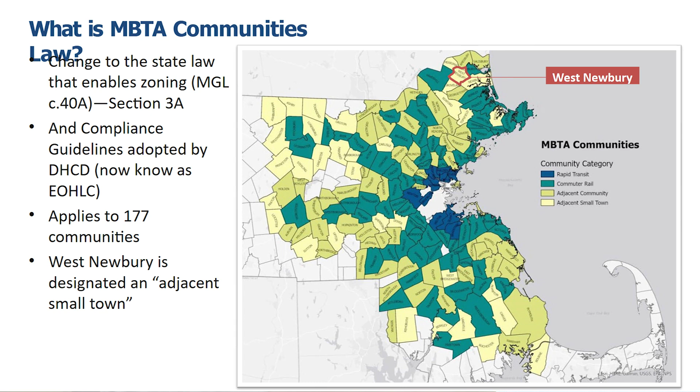So like I said, the law requires the town to adopt at least one zoning district. It has to allow at least 15 dwelling units per acre. So a dwelling unit is a complete living quarters for one household. It means it has to have at least a place to sleep, a place to eat and to cook, and a place to use the facilities. So that's a dwelling unit. So the zoning has to allow up to 15 dwelling units per acre.

The law, there are guidelines to the law that set a minimum number of units that every community has to zone for, and that is based on basically how close you are to an MBTA station and how big your community is. So you guys are at the lowest threshold of requirement, and for West Newbury, it means that the town has to have a minimum zoning capacity of 87 units.

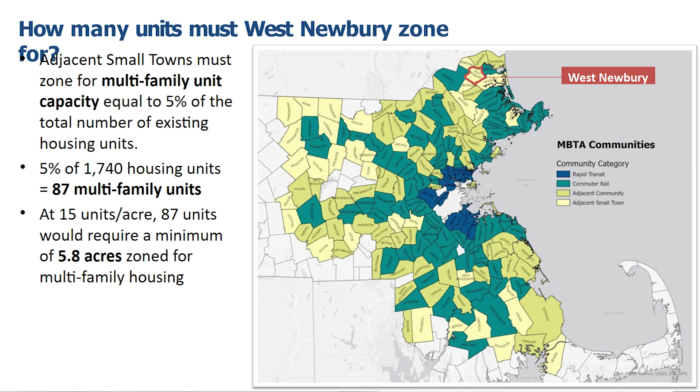Next slide. So some of you might be wondering, what happens if we don't comply with the law? So first of all, it's a state law. It's just like any other law that's out there. You're supposed to comply with the law. It's illegal not to comply with the law. So there are some consequences if you don't.

There's about 15 grant programs that the state offers, some of which are substantial, like MassWorks, which is the state's main infrastructure funding program, that the town will not qualify for if you don't comply with the law. So there's a money stick attached to this. You'll lose out on significant grant funds if you don't comply. You also might be subject to either civil enforcement or enforcement of state and federal fair housing laws. So complying is something to take seriously.

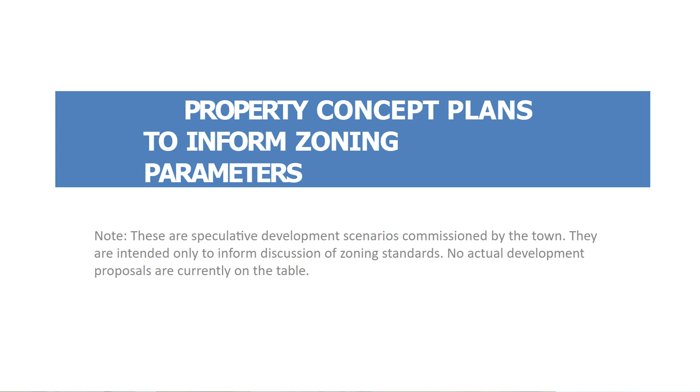So Peter is going to walk you through some concept plans for properties that we're looking at for potential zoning districts. We went through a process of looking at the entire town, analyzing what properties seem viable for multifamily housing based on physical constraints, things like steep slopes and wetlands and floodplains, regulatory constraints, things like wetland buffers or river protection areas, and then also just properties that seem like they would be not viable to be developed, things like cemeteries or town-owned properties or protected open space.

And so through that process of basically knocking out all the land that was not really suitable for multifamily housing, we settled on essentially the Main Street corridor as the most suitable place for multifamily housing, in part because it has your most robust transportation infrastructure. It's got a road that's already carrying traffic and is able to carry traffic. It has sidewalks in some places. It also, in some places, is served by drinking water, which is important if you're trying to develop additional housing.

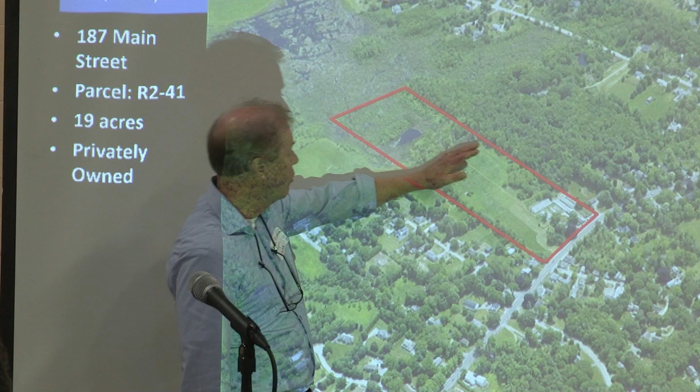So you're familiar with both of those properties. They're old greenhouse sites. You may have shopped there over the years, but both of them go way back from the road, and you may not be familiar with how much land is there. So Knapp property has relatively narrow frontage on Main Street, but it goes way back. But the back third of it sort of rises up to a hill and then goes back down again. And the back of it is mostly wetlands. So of the 19 acres, not all of it is developable.

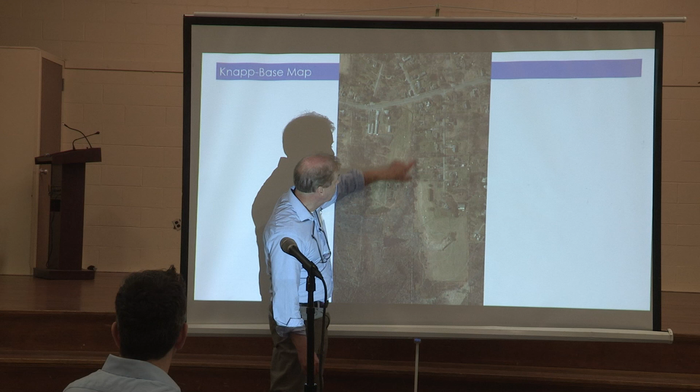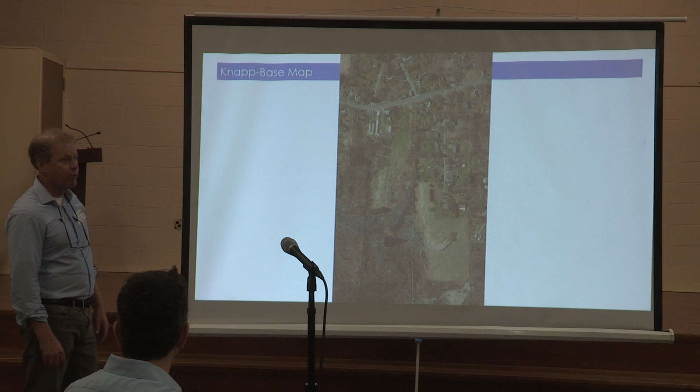The next slide, Dylan. So this is looking at it from a different direction. This is north facing up. Here are the greenhouses. This is the property boundary. So it's this long, narrow property with wetlands in the back, a big field, and then the greenhouses in the front.

So in terms of what we look at and what we're trying to encourage with the zoning is development that actually enhances a neighborhood and enhances the town. There's always the joke: what do you name a subdivision after? It's the thing that you get rid of, like Open Meadow Estates or Deer Run. There's no longer any deer or meadow there. But here we're actually trying to preserve as much as possible of the beautiful open space, or wetlands, which of course have to be protected under state law, and really use the development to create something that's not going to be just an eyesore.

And so Dylan's going to talk later about the design standards that go along with the zoning that are really intended to make it the best possible kind of development for each of these sites, really forcing people to think about the design more deeply than they typically would with a subdivision. So when we look at this site, for the purpose of these demonstration plans, again, these are just imaginary plans that are meant to guide future development. They're not the future development plan itself.

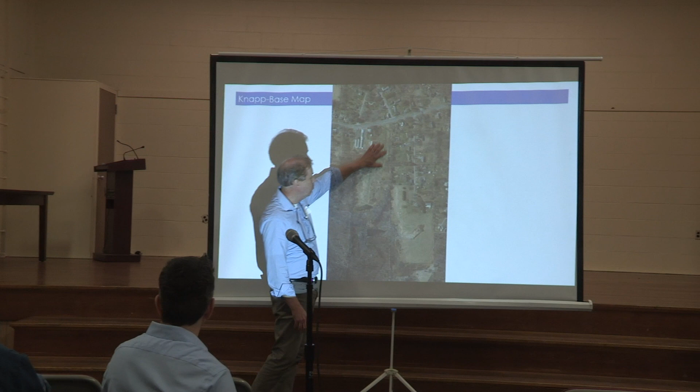But when we look at it, we're trying to demonstrate some of these principles of good design, one of which is let's protect what we can of the site while we're developing it. So when we look at this, that big open meadow with the view from Main Street is really beautiful. You don't see a lot of it, but it's a really beautiful view. So can we protect that?

Can we create some buffers to the wetlands that go beyond the minimum buffers required by the law? Can we reuse some of the parcel that's already been developed rather than just digging up the green part of the property and not reusing the greenhouses in that area? And so the plans are really keeping those kind of things in mind.

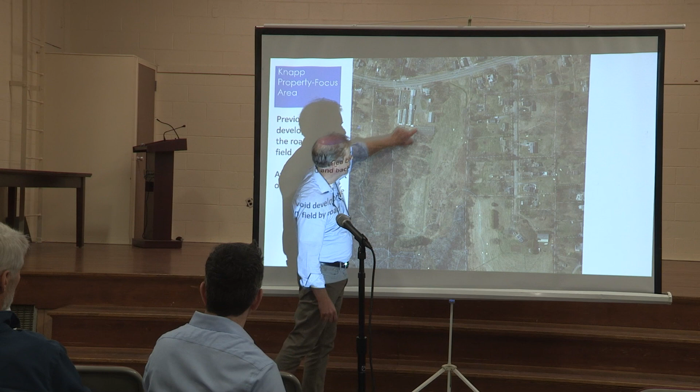So the next one shows, zooming in a little bit, the previously developed area up by the roadside. You can see the contours here, there's kind of a knoll in the middle, and then it wraps around and down toward the wetlands.

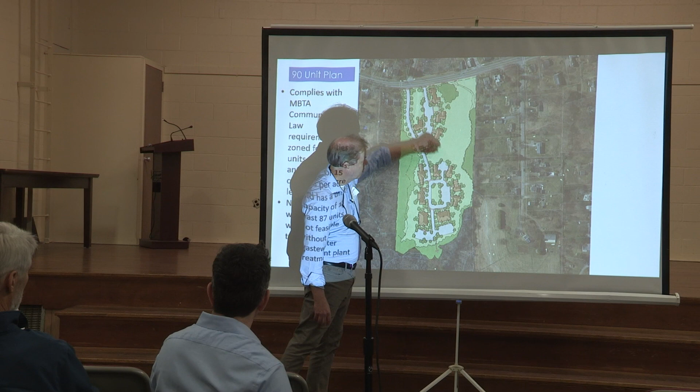So the next slide shows one potential development, which is development of this entire area. If you drew a line around this, this would be about the 6 acres that we're aiming for to get the minimum density under the law. So if you zone that 6 acres for 15 units an acre, it's about 90 units, which meets the town's requirement to create at least 87 units.

One of the things we want to point out is that, as you know, the whole town is on private or shared wastewater systems, mostly large septic systems, and this would probably be served by a similar kind of system. Under the state law, under Title V, there's this cutoff point at 10,000 gallons a day; if you produce more wastewater than that, you have to have a much higher standard of treatment, which basically is a much more expensive treatment plant with much more oversight forever. The good thing about that is you get better water quality coming out of it.

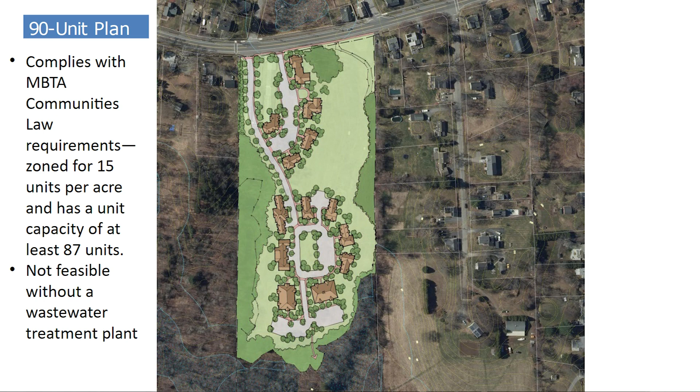The bad part of it is it's very expensive, and it's unlikely that anyone would be able to afford to build just 90 units with a private wastewater plant, and 90 units is about 20,000 gallons a day. All of which is to say that what's more likely is somebody is not going to build 90 units on any of these properties. It's probably going to be more like 30 or 40 units. So the next slide I'm going to show you, we won't go there yet, but the next one is showing one that fits under the 10,000 gallons a day.

So looking at this property, we're sort of starting by, how can we enhance that experience from Main Street? Let's protect the view of that big open meadow. Let's reuse some of that development. So this is like redeveloping that existing house for 2 or 3 houses, maybe turning the barn into another 2 or 3 houses, and having a driveway with some parking areas that sort of curves around a lovely green space, and then have the main road come in along the edge of the property and wrapping around the hill.

And we won't go into all the details, but this fits very nicely within the topography of the site. It also brings the entrance of the road directly across from, what's the name of the road across the street? Harrison. So it basically creates a right angle intersection with the other road. It's at the base of this curve, so there's good sight lines in both directions, etc. So this seems like a good place to have that entrance because it avoids impacts on the visual character and fits well with the site, and then provides this opportunity for a little cluster of homes as you come in.

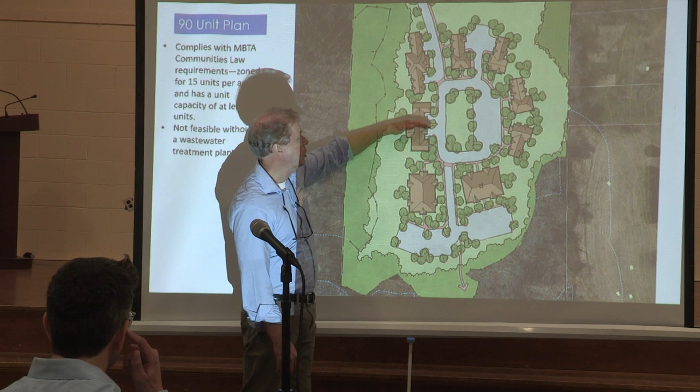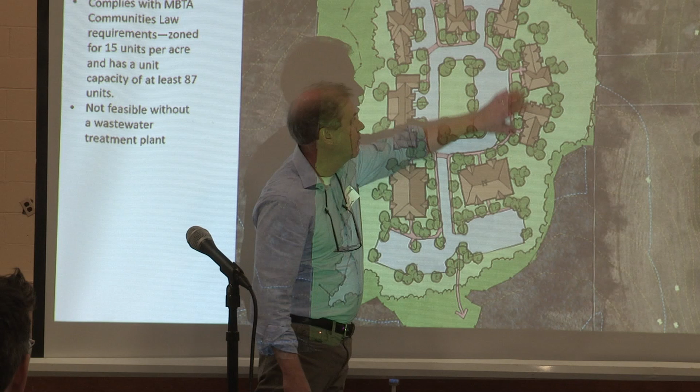And as we move further to the south, there's room on the back part of the site for a larger cluster of buildings. And in this case, this could include a combination of townhouses. So these are homes with a shared wall. And these 2 structures might have 4 units in each one, but also some small apartment buildings. So this is like a 16-unit apartment building at 2.5 stories. And then some apartments where they're sort of stacked up above each other in units that are designed to look more like big single-family houses.

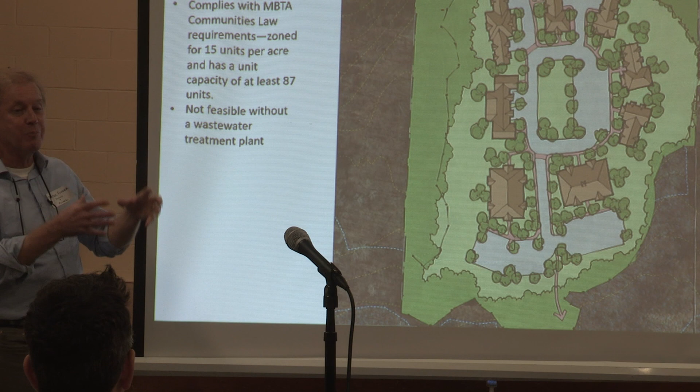And in fact, if you put these next to a lot of the single-family houses that you have here in town, they would probably be smaller since you have some big houses. But the idea, and this is captured in the design standards, is to really have architecture that feels like big rambling country houses, not shoebox apartments that you see down by the highway.

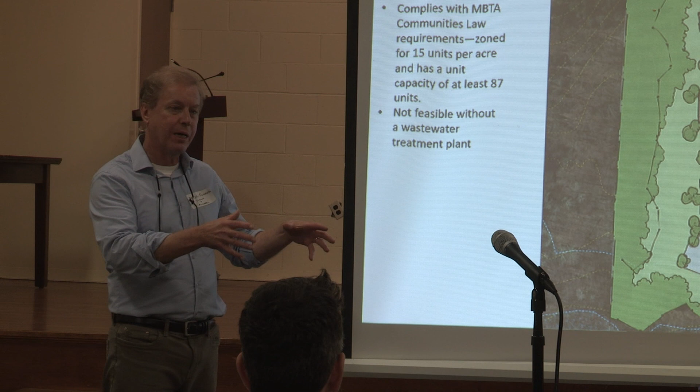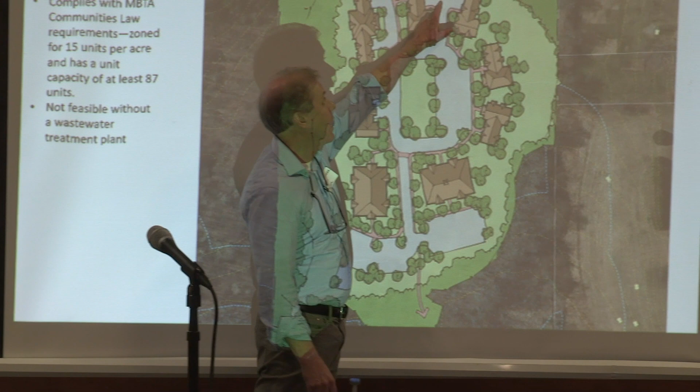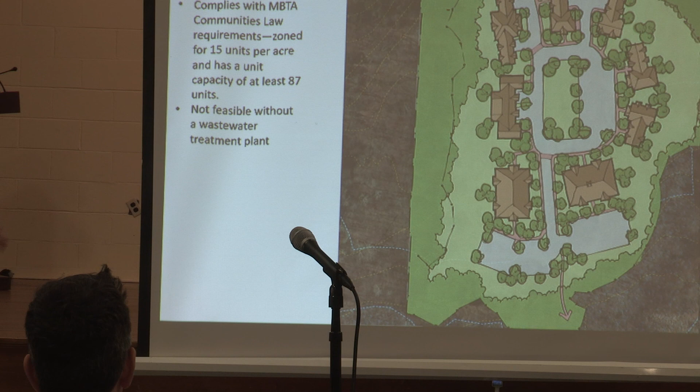And then the other idea here is to focus the view as you come around here on this nice green space, to have parking that is placed behind the buildings or inside the buildings or to the side of the buildings, not right out in the front yard, right? So it's really kind of a village-style plan where you come in and you see a beautiful green space, you see the front yards and front porches, and it feels like you've really arrived in a community rather than just another subdivision.

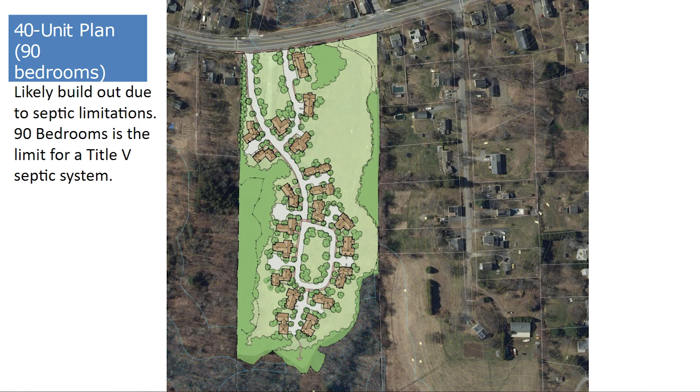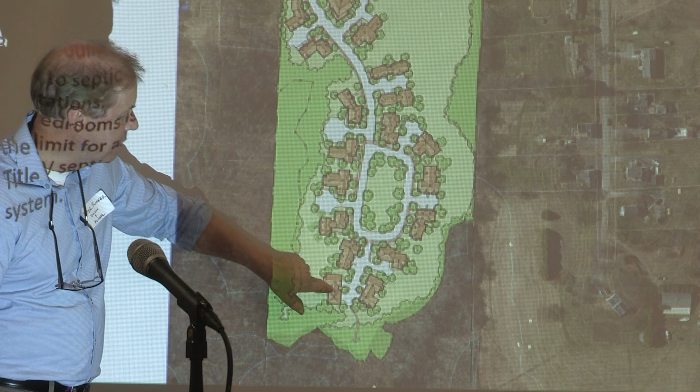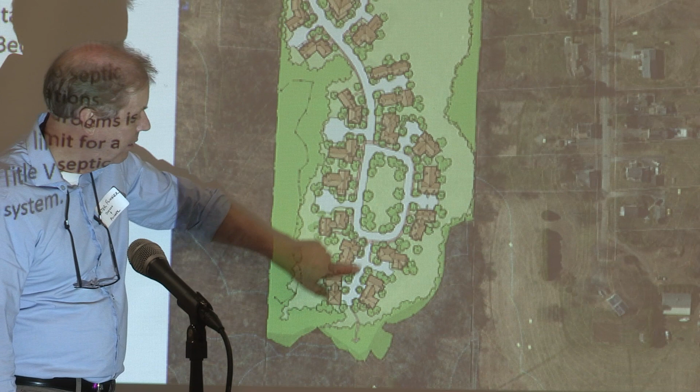Next one is a 40-unit plan, and you'll notice the footprint is quite similar. We have the entrance, we have a little loop road, we have a larger loop in the back, but in this case, it's less than half the number of total units. So what these are is smaller, more traditional house types, most of them connected as duplexes. And so again, with shared parking in between the units so that you're not looking right into the garages on the side and in the rear. Here there's 4 clusters of 2 that share a driveway.

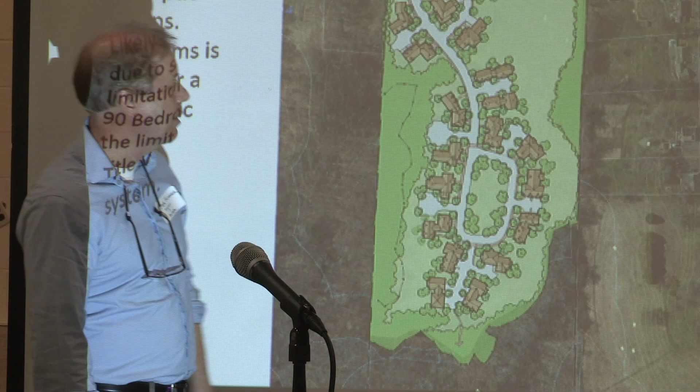But again, the principle is to arrive at the beautiful part of the site, have the parking tucked behind or in between the buildings, and then have a lot of trees planted around, continuous sidewalks that link all the different parts of the property, and also continue into the rest of the site, which is going to be protected. Do we have details of this one?

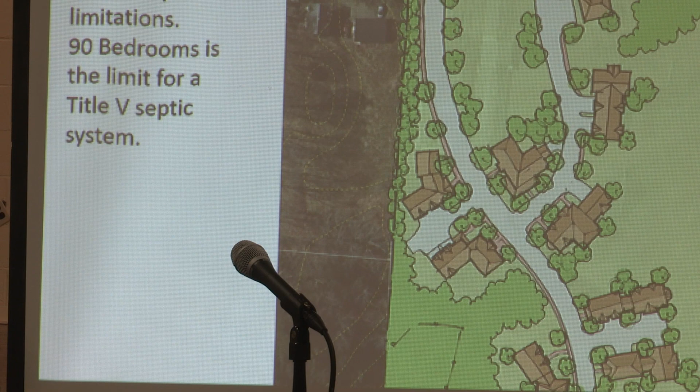Yes. So in the front, again, what you see from the road is the entrance drive, a big open space, cluster of houses. And one of the things we're trying to do with these is capture the sense you get when you drive through a typical New England town like West Newbury, which is you come through an open space and then into a dense cluster of houses and then back into the open space again. It's varied and interesting, right?

And so we can do that, both as we drive along Main Street, but also as we come into the property, sort of open, more dense and interesting, then open again. If we go to the south part, you come to that big open green space, which is big enough for recreational purposes. Kids can go play ball there.

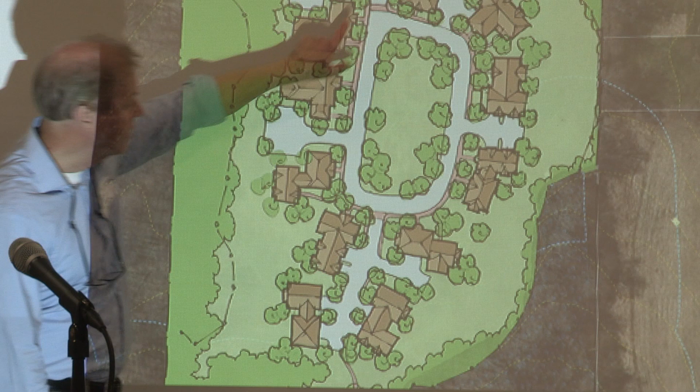But then each house has sort of a formal side facing this green space, where you can have front porches and walks coming up to the porch from a sidewalk that rings the whole thing. And in the back, you have private space. There's probably going to be condominium ownership, but each unit can have its own designated space with a private view out into the surrounding woods and wetlands.

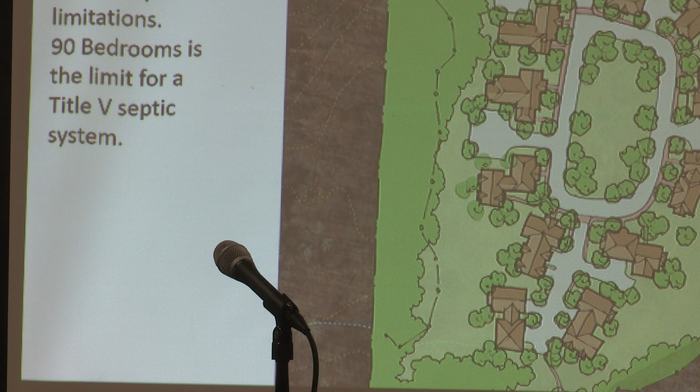So again, a lot of this is stuff which any private developer would do in a market like this to try to make a really nice quality development. What we're really trying to do is capture this in the design standards to make sure that they have to do it. Again, so that in the end, this really becomes something which is an asset to the town and not just another eyesore that you say, well, it's too bad they did that.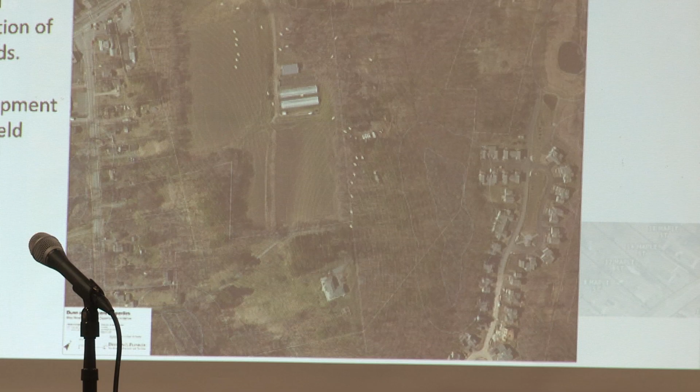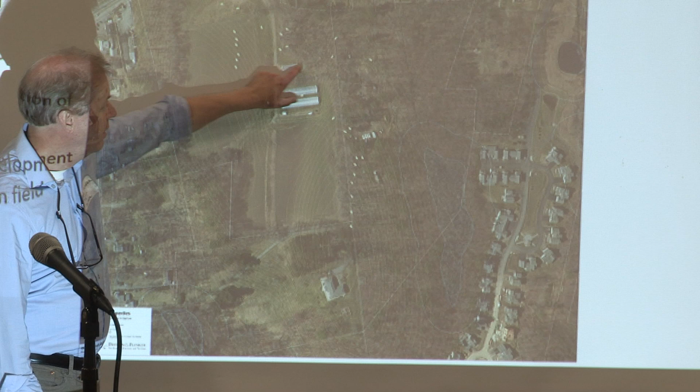So this is looking at the parcel boundary here. And again, we're looking at this beautiful big open knoll, which seems like a really great thing to try to protect. There's this other area where you have some existing greenhouse development in an area that's not really visible, which seems like a good place to develop. And then you have the area up toward Main Street, which is already developed.

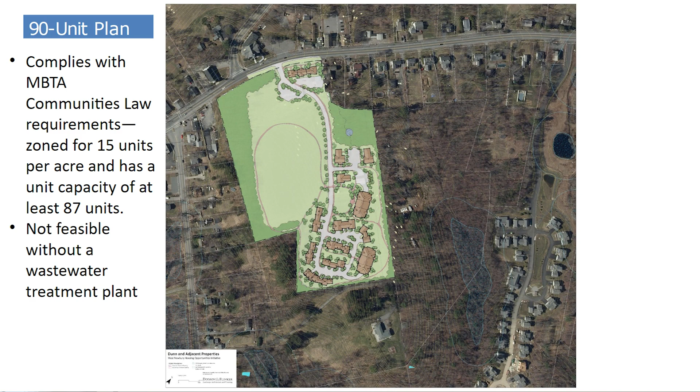So if we go to the next slide, it shows one option for that. And this is again with the 87 or 90 unit plan. And this is, again, designed to be kind of a varied experience as you come in on the main road. You look up at the protected open space on either side, and then you come into something which is designed to feel like a real cohesive neighborhood. So we go to the next slide.

This is a larger apartment structure with maybe 20 or 22 units. We've got townhouses, which are sort of individual single family units that share a side wall, and then some smaller apartment buildings where the units are stacked up above each other.

But again, we're trying to orient the buildings so they have kind of a formal face, which faces the public space on the street, and then they also have, to the extent possible, private deck spaces to the rear. They can look out on the open space, or in this case, there's kind of a parking court on one side and a shared green space on the other between these rows of townhouses, and a pathway that leads up to this larger apartment.

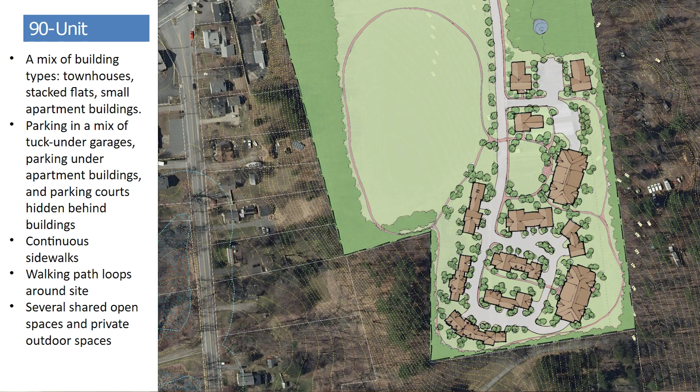So again, it's taking a cue from a lot of development we're seeing now, which tries to mix different kinds of housing types together, which is good from a demographic standpoint, because we need lots of different kinds of housing types, because we're no longer all two-parent families with 3 kids. We're much more varied demographically. And so the apartments provide for smaller units, for younger people or older people. The townhouses, of course, can accommodate anybody. Larger duplexes might be for families.

So it's really trying to enhance the overall inventory of housing in the town by providing more diversity that can meet many different needs of different people without having to move to a different part of town and live in an ugly condominium when you're young, move into a big single-family house when you have a family and then have to move back to the condominium. It might be staying within a single community like this throughout your life.

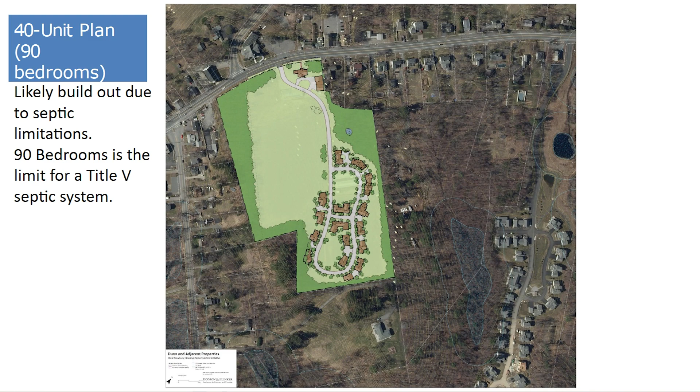Right, so this is the last one, which is, again, the 40-unit plan. So the previous one was 90 units. This is 40, more likely to be the scale actually going to be developed on these sites because of the septic requirements. So in this case, if you go to the next one, we come up and we have that long loop road. Loops are necessary because you want to have public safety access that's not limited to just a long cul-de-sac. But they also give some opportunity to create some sub-neighborhoods within the overall project.

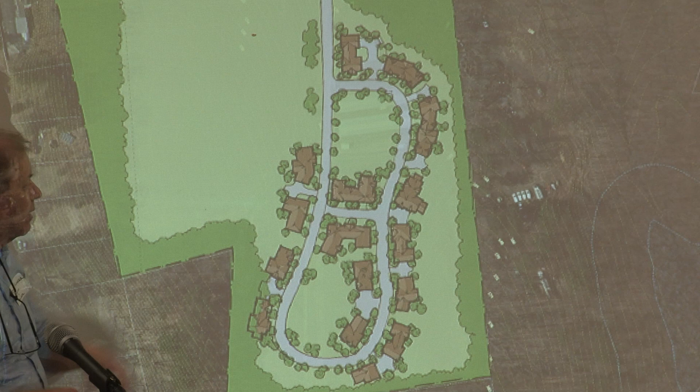So you come in, you sort of arrive at this big open space ringed with houses. Again, parking to the side or the rear, private space to the back, sort of more formal public space to the front, some shared open space for kids to run around in. This link provides access to some garages in between these building structures. And again, a variety of, in this case, mostly townhouse style units, but in sets of 2 and 3 and 4 and 5 units, giving it some variety as you go through.

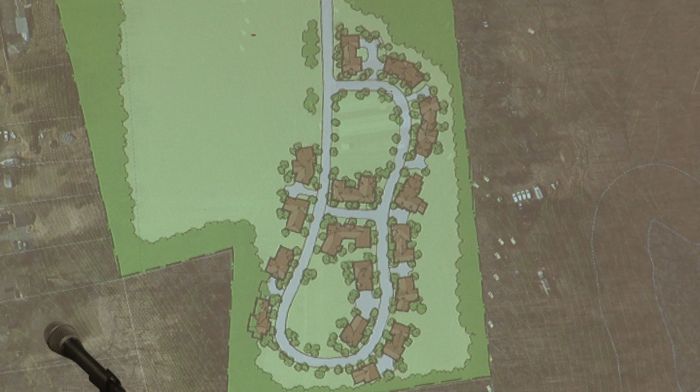So here are, what are we seeing here? Dylan, are you taking over at this point? This is a very carefully coordinated presentation.

Back to you. So the idea with doing those concept plans of drawing out what development could look like on these sites was to both get a sense of what might be acceptable to the town within the parameters of the law, but then also to use the knowledge that's generated by drawing the plan as the inputs to writing the zoning, right? So that the zoning is based on the plan. A lot of times what happens when people write zoning is they kind of pull out abstract numbers that sound good, but there's no plan behind it. So when somebody goes to develop the site, they're applying abstract numbers to a real site, and it doesn't really work so well. So in this case, the concept plans drive the zoning.

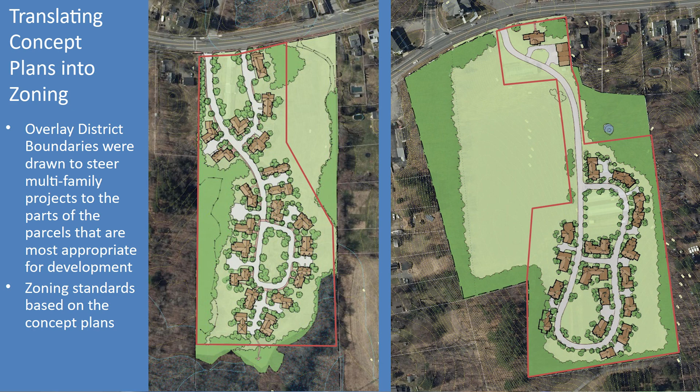Next slide. So translated into just zoning boundaries. The idea that the planning board is currently considering is to adopt 2 different overlay districts. They have the same standards, but they're 2 different mapped areas. So one for Knapp and one for Dunn. Either of those areas on its own would fulfill the town's requirements under the law. So a big question moving forward is, should the town adopt zoning for one of these areas, and if so, which one, or should it adopt zoning for both of them?

I think the rationale for adopting zoning for both of them is, A, the town does have needs for diverse housing. So there's a sensible basis for this law. Whether the law itself makes sense, I'll leave that up to you. But there is a true housing crisis in Massachusetts.

If you have a relationship with somebody who's been trying to buy a house and doesn't have a lot of money, or even has a lot of money but is in a high expense market, you've probably seen a lot of angst and a lot of challenges. There's a real need for housing, and there's a real need for smaller units than the single-family housing that dominates

many communities like yours. So reason number 1 for adopting two districts is to fulfill the town's housing needs, to make more opportunities for older people, to make more opportunities for younger people, to make more opportunities for people who work in the town, who grew up in the town and can no longer afford to live here. And then reason number 2 is it sort of aligns with the spirit of the law.

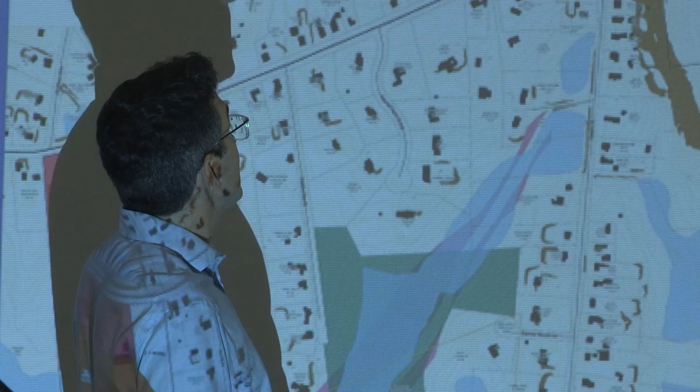Your commercial zoning district is barely legible on this map, but it's basically up in here, comes across the street, and then drops down right here and excludes the portion of the Dunn property that used to have the greenhouses. So the idea here is to allow mixed use, which would extend your commercial district a little bit further up the road, which probably would make sense regardless of this zoning change from compliance with the MBTA communities law, because it would enable commercial development across the street from other commercial development, on a portion of the lot that's actually possible to have commercial use on. And then also for the front of the Dunn property where the greenhouses were.

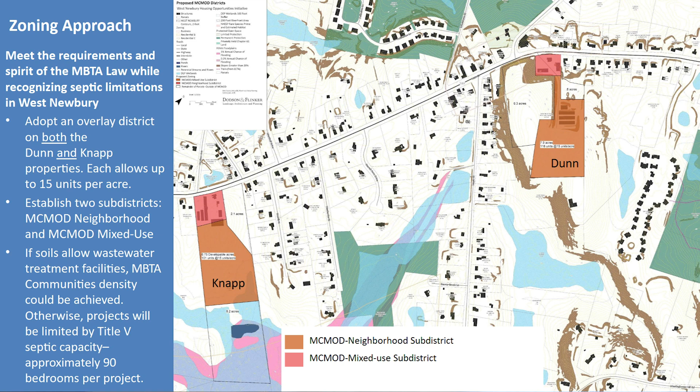So some of the standards that are written into the zoning, so there's a draft of the zoning and it's on the town website now, maybe? Okay, just finished writing it last week, so it's a little fresh, but the planning board is gonna start reviewing it at their next meeting and subsequent meetings. So the zoning has a minimum sort of tract size to opt into the overlay district of 5 acres. So either of these sites would work, but you can't really subdivide them much and still opt into the zoning, right? So you couldn't split off like half of this and opt into the zoning. You need to use pretty much most of the entire overlay district to take advantage of its provisions.

On the front part of Main Street, the front setbacks are basically based on the average of adjacent structures. So it's saying, make the front setbacks like what's there now along the street. On the interior of the lot, the front setbacks are relatively short. They're a minimum of 5 feet. That's in an attempt to get a density that matches what's required by the law, while allowing things like townhouses and smaller multifamily buildings. So in order to fit smaller buildings on a lot as opposed to really big shoebox apartment buildings, you have to put them relatively close together and close to the street. And close to the street actually creates a nice walkable village center feel. So that's the front setbacks.

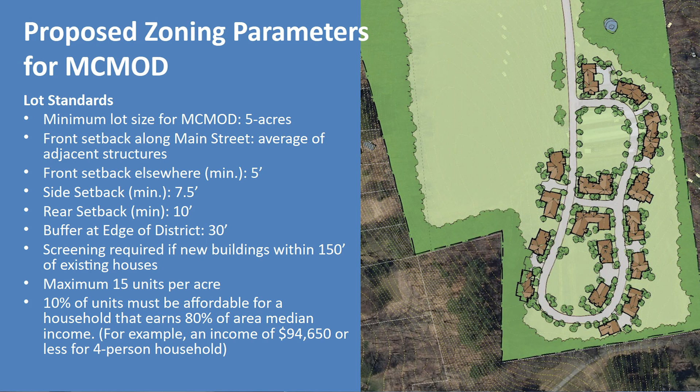Looking at parameters for site design, so as Peter mentioned, the concept plans showed loop roads, so the zoning encourages loop roads. They're good for fire access, but they're also good for shaping public open space within a community and creating interesting sort of clusters of houses that make something that feels like a neighborhood as opposed to just a road that goes straight back to the end of the property with a cul-de-sac at the end. Might feel like a dead end.

The design standards require a continuous network of pedestrian paths and sidewalks that link all parts of the development. It requires that buildings create a pedestrian scale streetscape. So part of that is the shorter front setbacks, having a nice relationship between the heights of the buildings and the width of the street, having front landscaping that creates a bit of a buffer between the sidewalk and the front of the building, and that buildings be grouped around common open spaces where possible.

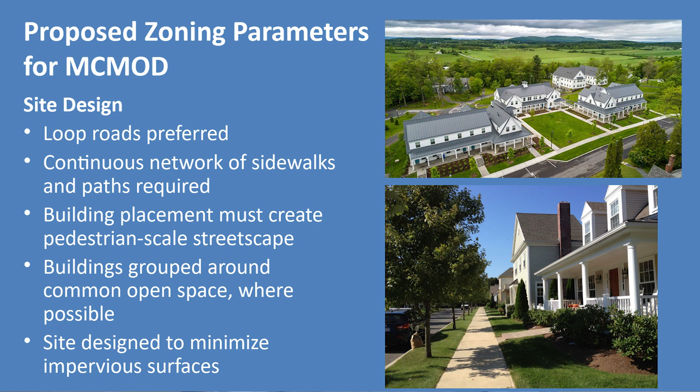So again, you saw that idea in the concept plan of buildings that shaped open spaces, shaped shared places, shaped little commons, shaped little greens. And then sites should minimize impervious surfaces so that stormwater is soaking into the ground and replenishing your aquifers.

Looking at open spaces and landscaping, there's a minimum 30% open space requirement, so 30% of the site has to be not paved, not have houses on it. Shared open spaces are encouraged. There's a design standard that says that all the open spaces have to actually have a function. So a lot of time what happens is when a subdivision is laid out, there's a bunch of leftover space that's not really useful for development, and that gets used to fulfill an open space requirement. And it's not very useful space, it's leftover space.

So there's a design standard in the zoning that says you have to show us that your open space is actually useful for something. You know, either it's useful for recreation, or it's useful for habitat, or it's useful because you intend to actually do some landscaping that makes it beautiful, or it provides a scenic vista, or something to that. Where are my native plant people?

So I saw the invasive plant table back there. So the zoning requires native or low maintenance plants. So plants that don't require large amounts of fertilizer, don't require a large amount of irrigation, and so forth. And then like the open space requirement, the landscaping itself has to have a function. So looking for landscaping that defines outdoor spaces or provides habitat or is beautiful to look at. Next slide.

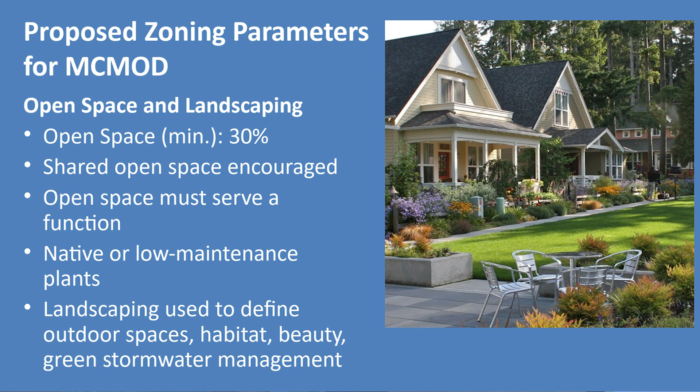The design standards in the zoning establish allowed building types. So those are the building types that Peter was describing in the concept plans. So you could have duplexes, 2 families, either side by side or up down or front back. You can have townhouses, which are multiple, basically single family units that are attached on their side walls. And those can have 3 to 5 units. You can have stacked flats, which are units on top of each other, usually around a small shared corridor or a staircase. So those can have 3 to 10 units. You can have small apartment buildings with 8 to 24 units, or mixed-use buildings up to 20 units.

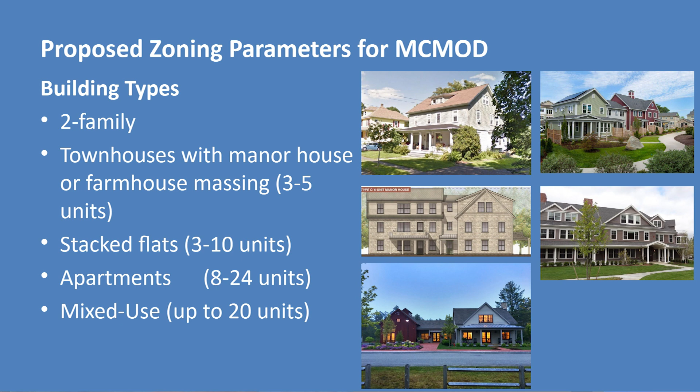And then there are some design standards for the buildings themselves. So the maximum height limit is 3 stories. All the buildings have to have a front entry that faces a street or a shared open space. The buildings can't have any walls that are longer than 40 feet without a jig or a jag that breaks up the massing of the building.

So even if you have a larger apartment building, it needs to have some variation in its shape that makes it more in keeping with the size of the buildings that are currently in West Newbury. And then the same for roofs. Roofs can't be longer than 40 feet without a change in their height, or having a dormer, or changing direction.

And then windows. This may be too much for you guys, but it makes sense to me. So windows have to be aligned vertically, and generally aligned. Not every one of them has to be exactly on top of the others, but generally aligned vertically, and generally aligned within floors. I was driving down Main Street on my way here tonight and seeing all the houses with their lights on, right? And there's a pretty strong pattern in your community of buildings with windows that align.

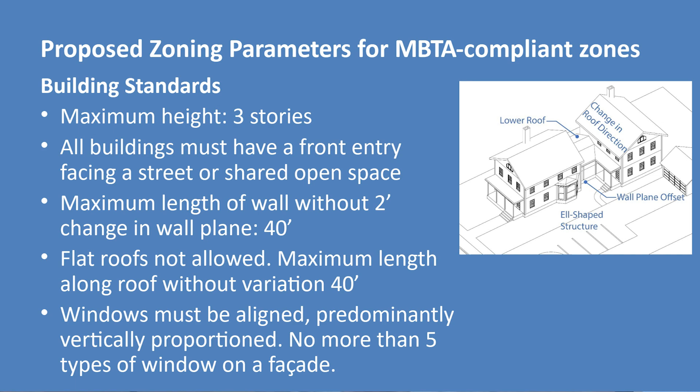And then no more than 5 types of windows in a facade. So, not a triangular window here, and then a big square window here, and then a rectangular window here, and then another little rectangular window here, and then a long skinny window here. I think 5 is enough. So again, that may be too much for you. And we're looking for feedback on what's too much, what's not enough in zoning standards. Next slide.

Okay, parking requirements. The zoning sets a minimum of 1.5 spaces per unit. Obviously, if you have an odd number of units, that gets rounded. It requires bicycle parking. Basically, it says that if there isn't a garage space dedicated for a unit, then there needs to be a covered bicycle parking space that's available to that unit, with a percentage. All the parking has to be located to the rear of buildings or to their sides or within the building. There's an out the planning board has when that's not really feasible.

There's a standard that curb cuts should be minimized. Basically, we're trying to keep the sidewalks as consistent as possible, so they're not frequently interrupted by driveways. When you have a development with more buildings clustered in a smaller area, if every one of them has a driveway that's interrupting the sidewalk, basically you have more driveway than you have sidewalk, and it doesn't really feel that friendly to walk on.

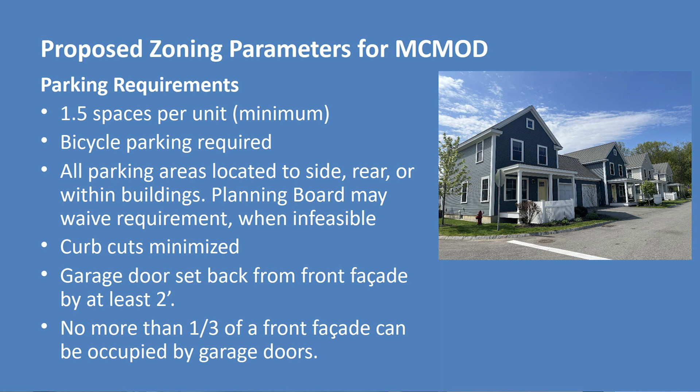And then garages have to be set back at least 2 feet from the front facade, similar to what you see in Drake's Landing. The garages can't dominate the facade, so no more than 1/3 of the facade of a building can be garage doors. Next slide.

So all these design standards are based on looking at places, West Newbury and similar places, and looking at the historic patterns of development, and trying to come up with objective standards that define some of the basic characteristics of built form. The standards have to be objective because it's by-right development. So the planning board will review projects through site plan review. They can't reject projects. They can't say, no, you can't do this project, but they can condition plans and say, you didn't meet this standard, so we want you to do better in a specific way. So they can have objective design standards.

And then the last part of this are bonuses. So again, looking for feedback on these. It's difficult to design bonuses when the law requires pretty dense development, and it's possible that nobody would really want to build more than what's allowed. But in case somebody wants to do more, there are two bonuses that are allowed. The first is for permanent protection of the remaining open space that's not covered in the zoning district.

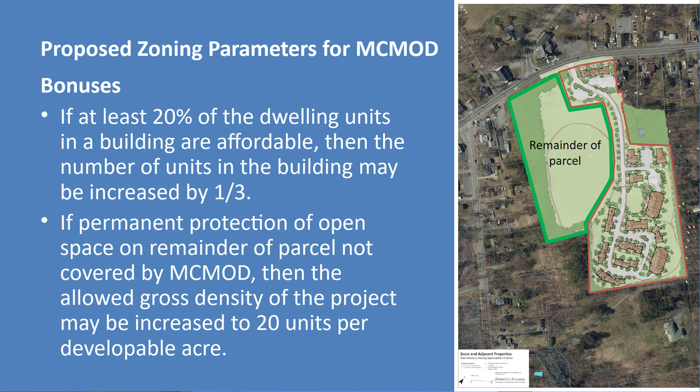So then the other bonus is if you provide more than 10% affordable housing, if you go up to 20% affordable housing or more, then the number of units in the building can be increased by 1/3. So if you combine those two things together, maybe you get more units per acre, as long as somebody can viably do that within septic. You get some public benefits and something that might be useful for a project proponent. So that's the end of the presentation.